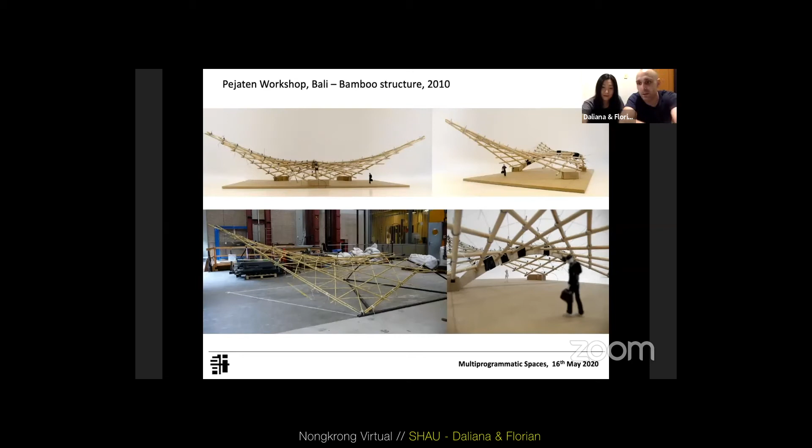So, for instance, we came up with a hypar structure, which is a double curved surface, but it's only made from straight elements, right? It's sort of a ruled surface. So you could make it from straight bamboo stick elements. And we were not able to realize the project, but recently we were approached by Francis Surjaseputra, difficult name, sorry. He's organizing in Bali a sort of kampung, a sort of village with different pavilions where tourists can stay, sort of an alternative concept for tourism. There's also other participants. Budi Pradono is participating. Who else from Indonesia? Mas Eko Prawoto is the master planner.

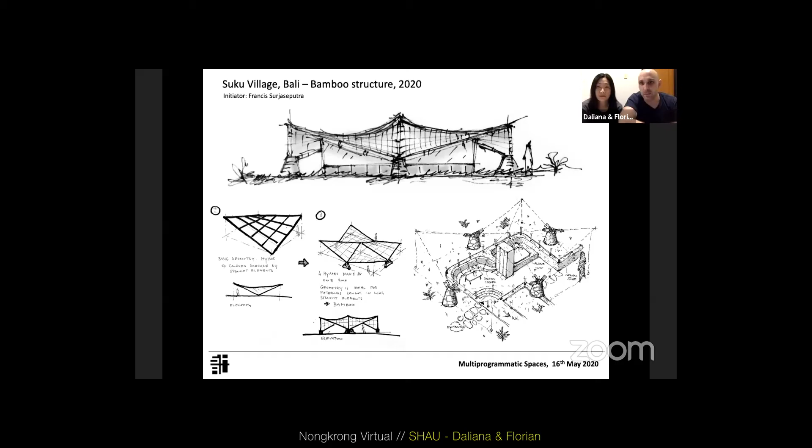Yeah, so now we bring some of our early concepts back, like this bamboo construction and the ruled surface idea, something which can be built relatively easily, not cheap in terms of the material, but cost efficiently, and nonetheless giving our own twist to the whole thing.

And this is a competition we did also together with Tobias. It's been on our homepage for a long while, and you see this is a roof structure for a bus stop next to a train station in Esslingen. Esslingen is pretty close to Stuttgart. Stuttgart is where Mercedes-Benz comes from. And you see these interwoven patterns. So basically we have these linear elements which act as daylight coming in, and then this interwoven surface being the roof structure itself.

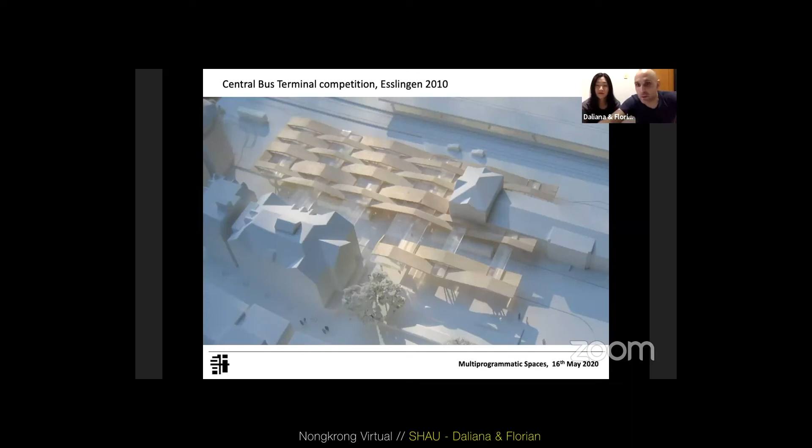And we did not win anything in this competition, but when it came to Bojonegoro, we needed to design and come up with this parking roof structure within no time. I think we had 2 weeks to design that, because this was very tight because of the budgeting year. How do you call this in Indonesia?

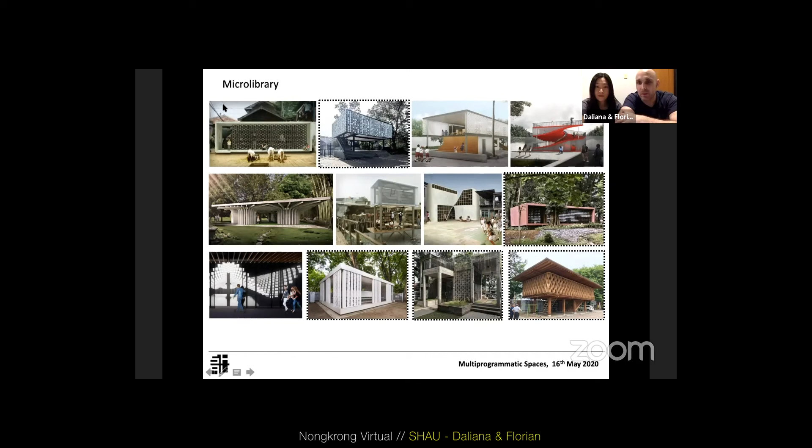And after a couple of others, we were asked to design the microlibrary in Semarang, which we made Warak Kayu one. So yeah, it was designed 2018, 2019. Construction finished beginning of March this year. The client is the Arkatama Iswara Foundation.

So again, you see here what we started our presentation with: the idea of the roof, the idea of the ground going into the building or going underneath the building, as well as the screens and the layering of the external facade as a brise-soleil, and then the curtain behind. So these are all notions of elements we are very interested to design with.

And then of course, if you start to open it, the building has a completely different permeability. In the morning and during the day, it's more closed and more volumetric, and in the evening, when you turn on the light on the inside, it becomes much more open and much more breathable.

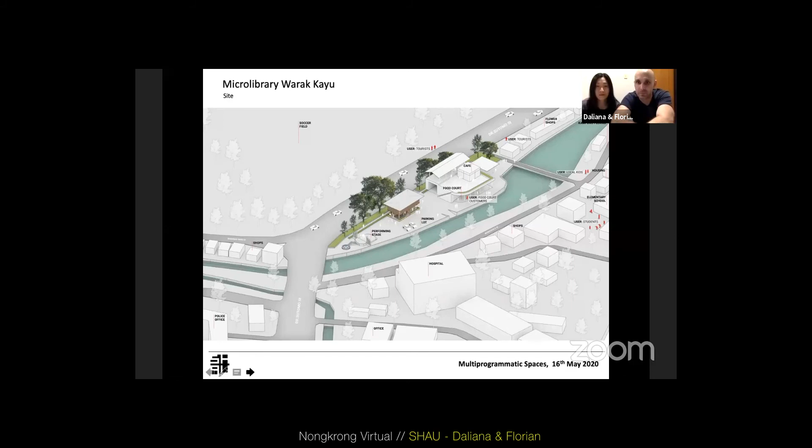So yeah, this is the view from the cafe towards the Kampung Pelangi. And it's what I meant: on the left side, you see all the plant shops. So for those of you who know it. No. Okay, next. That's the cafe. Then the city started to refurbish also this plaza a little bit.

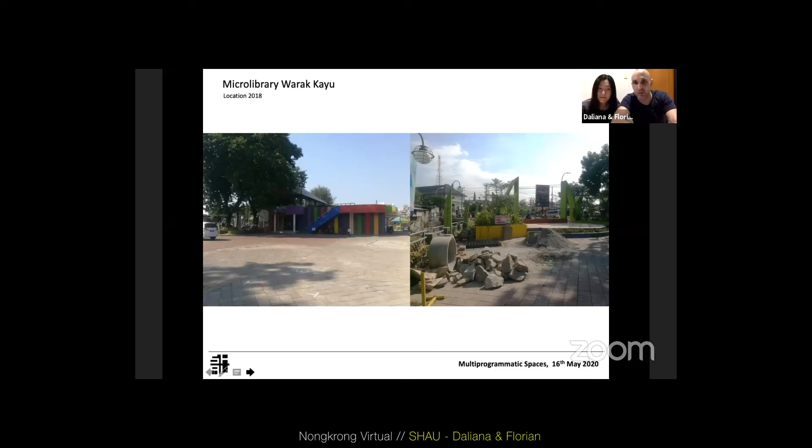So yeah, it brings it again back to these multi-programmatic spaces. Hopefully we can make this a little bit clear by now. It's not only what one building is containing, but how can you participate or build up synergies between different parts of the city, different programs of the city. So the building itself doesn't have to solve everything by itself. It can participate and anticipate what is available all around and can add value to that.

In terms of design process, we went to this factory and we looked at the products they have, and instead of dropping a design and saying we would like to make this in wood, we went the other way around. We went bottom up. So we first looked at what they have, and then we started to imagine what we can make from that. Rather than the typical architect who makes a sketch and then says let's make it. Of course, this is extremely reduced, but it's more like, okay, what could we do with this material? What can we imagine? And then I remembered my studies back in Germany.

What you see on the screen here is a construction principle from the early 20th century. It's called Zollinger construction. It's a reciprocal system, which is used usually for big wide-span halls or large-span roofs. But we were very fascinated by the detailing, that three boards are held together with one screw piercing through, and then the whole screen holds each other. So we liked it very much. It has a certain logic and sincerity to the construction.

We can use the plywood they're using, and at the same time it adds up into something we think aesthetically very pleasing, but at the same time it is performative. Meaning the screen is relatively deep, it blocks out the light from the early morning hours and the afternoon hours when the sun angle is deeper. If the sun is higher during the noon, the roof will shade. So it works as a multi-performative element.

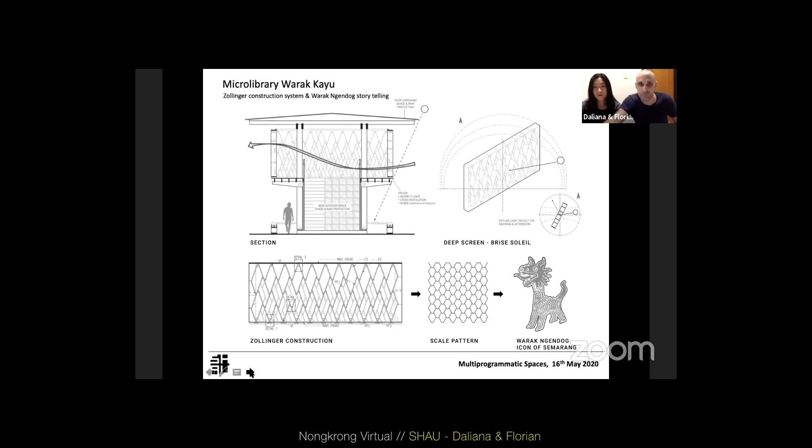So now we like to play and layer not only physical elements of buildings behind each other or with each other, but we layer also different performances. We layer the aesthetic, the cultural, the transparencies, the inside, outside, and the performative layer together. Yeah, this diagram shows a lot of this: what it is built up with and what specific material we used from them.

So the main structure is done by finger joint laminate from rest wood cuts, because they make a lot of furniture and flooring material from Bankirai which gets exported, and then you have a lot of little cutoffs, and if you cut them properly and laminate them together, you get this finger joint laminate, and you can make big beams from it. So all the vertical columns and the horizontal beams are made from Bankirai, partly from reused factory waste Bankirai. And Bankirai is a fantastic material because it's waterproof.

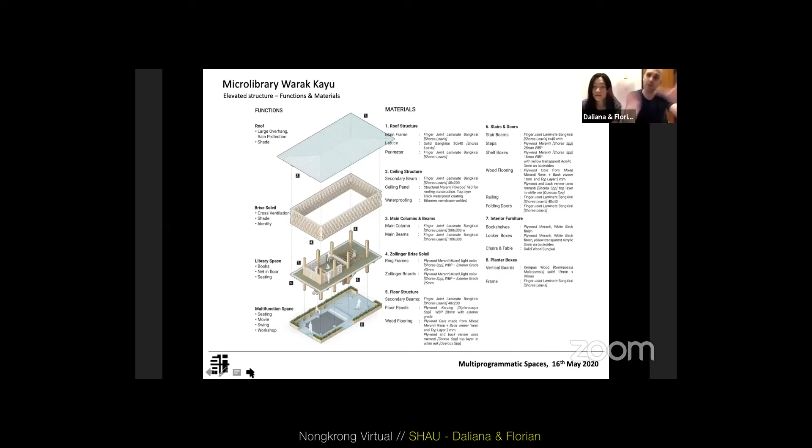All the other materials, the facades, the decking and the flooring, are made from Meranti-based plywood. But everything we use there comes from the factory, is pre-manufactured in the factory, and is delivered on site. I need to speed up, sorry. So with very little waste and very little pollution, because everything is kept within the factory. Pre-manufacturing allows you to keep the noise and the dust in the factory, and then you have a relatively fast assembly time on site.

Together with the factory, the factory built a prototype. So all the details you see here we developed, also with their in-house research and development team. There was a one-to-one mock-up done for us to look at the details. Are they good enough? Where can we work? Where does it not work well?

Where can we improve? And also, it served as a very good tool of communication with the contractor, who later assembled the building completely, to first understand the building on a one-to-one scale rather than only the drawing. So I think it's very important to show this. And if you have the possibility as an architect to make a one-to-one mock-up, being a facade mock-up, it's really fantastic, because it does not stay in the realm of the abstract anymore. Everybody can imagine immediately what we're really dealing with here.

The floor plan is basically one open space. You come up with the stair, and if you look downstairs, you see again, coming back, the sort of multi-programmatic aspect. So the upper floor with the library, this is just the library. You have shelves and you have reading areas, but then the lower floor, the stilted house typology, which traditionally is used for the cattle or for working, can now be arranged flexibly in completely different ways.

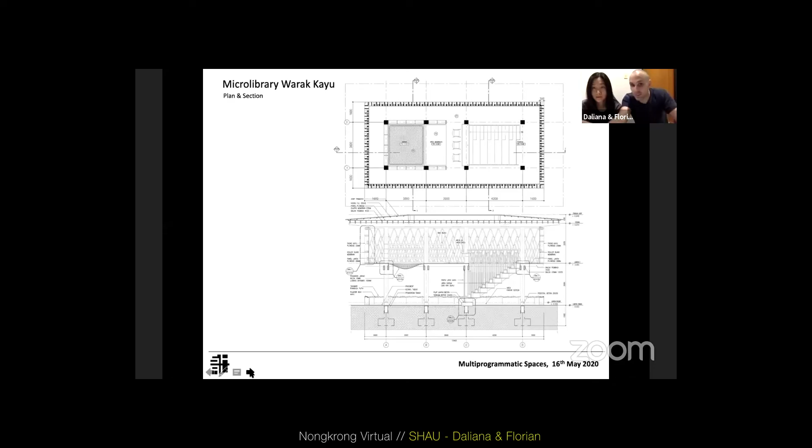It almost is Scandinavian, we feel, but at the same time, with the wood and with the color and with the surrounding, as well as with the pattern, it becomes playful. It becomes a little bit ornamental. So the whole Indonesian aspect, the whole tropical aspect, the whole culture of Indonesia comes back into the building, but a little bit of a different interpretation from our side.